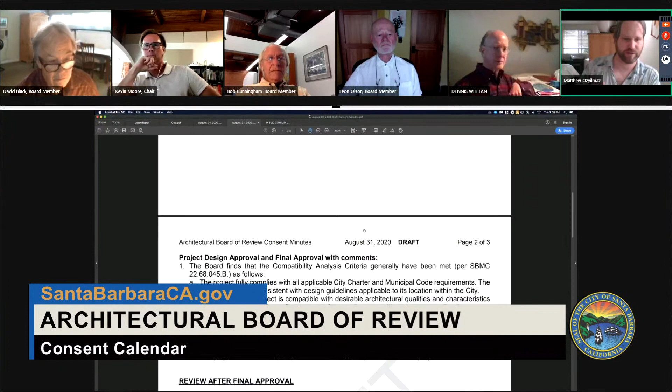Okay, and we can move to approval of the consent calendar for the 31st. All right, move we accept as presented. So we have item A, 626 West Cota Street, which was granted project design and final approval.

And then we had item B, 29 South Milpas, which was continued to the full board with comments. And I believe there was one more, yeah, item C, 401 South Hope. The proposed changes to the mullions was denied by the consent reviewers.

Okay. Move we accept as presented. I'm sorry, was that a motion? Yes, okay sorry, yes that was a first by Leon and David, were you seconding that? Yes, I can second that.

Okay, let's vote. All right, we have Chair Moore, yes. Board Member Black, yes. Board Member Cunningham, yes. Board Member Olson, yes, and Board Member Whelan, yes. All right, motion passes.

Thank you, okay, and then moving on to today. Yes, Mr. Chair. So for today's consent agenda, September 8th, we had a technical difficulty where the link on the agenda was incorrect, so members of the public were unable to join us. So all items on this agenda have been postponed 1 week. Okay, that is unfortunate, but part of what we are going through right now.

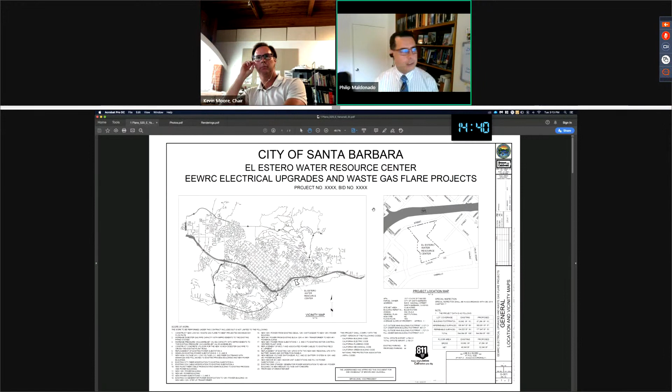But Matthew, if you could move to the second sheet in this set of plans. This is really what I'm here to discuss. This gives you an overview of the plant site and everything that we are looking to change or renew at the location. For a little bit of background, this is a necessary project for a critical infrastructure system that supports all of the processes at El Estero. The goal of the project is to eliminate the risk of failure by replacing the aging electrical distribution system infrastructure, improving redundancy, and eliminating single points of failure within the system.

For a little bit of background, the existing electrical distribution system and substations are all original 1970s construction. They are past the end of their useful life and are susceptible to catastrophic failure in general. The electrical system supports all of the other systems within the facility. The critical nature of the system combined with the risk of failure continues to make this work the highest priority for maintaining this facility. This project focuses on the main power feed and distribution panel, the 5 substations, and feed lines connecting all of that equipment. And if you take a look at the existing plans, you can see how we plan to replace the existing system by building a system in parallel.

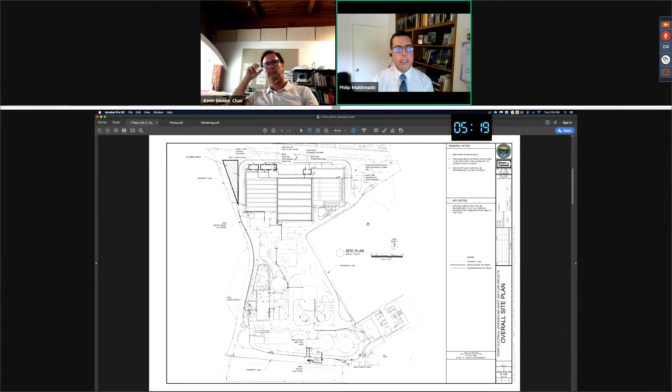So at this point, going back to the plans, this hopefully gives you better context of what this plan depicts and how we plan to replace a critical piece of infrastructure. We made sure to pull out the existing architectural elements that were approved with the original facility, and that's what has been incorporated.

So we feel we have substantially conformed to the existing aesthetic of the facility and surrounding area, and we are including the lighting standards. Keep in mind these facilities are utility in nature, not made for continuous human occupancy. They will have high voltage power equipment installed within them, and they're there to keep the plant functioning as intended. With that, I'll leave it to the board for questions or input.

That'd be much appreciated. Okay, thank you.

Let's open public comment now. If any member of the public would like to address the board regarding this project, please raise your hand. Thank you, Mr. Chair, I don't see any attendees at this point. The only one we have is actually a panelist for a later item. We did not receive any written public comment.

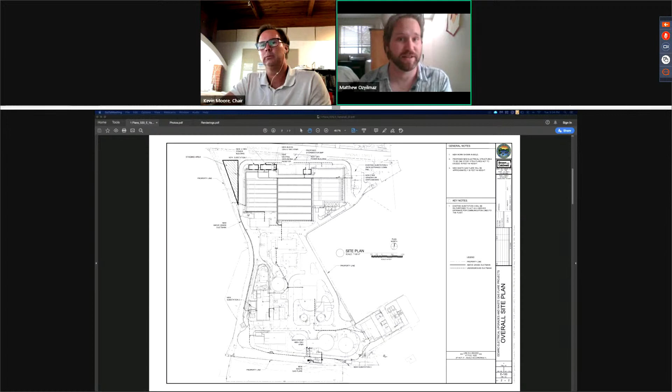Okay, great. Then we will close public comment and go to questions. Oh, go ahead, Matthew, one thing to consider, I should have made this announcement at the beginning. This project does need a coastal development permit, so this will need to go to the Planning Commission. Keep in mind that if you send this on to Planning Commission today, we need to make a preliminary take on the project compatibility analysis. Okay, so we're going to move on to questions from the board.

If we could have the applicant back up on screen here. There they are. Okay, I'll start off with a couple of general questions. Are any of these buildings going to be actually visible from Yanonali Street or any of the surrounding streets?

Chair Moore, members of the board, yes, the buildings along the north side will be, I would say, partially visible. I took photos from the street to show what is already screening the existing facility. These will be basically nestled against the existing buildings, which will be taller than these new buildings being installed, so it'll be a limited view from the street.

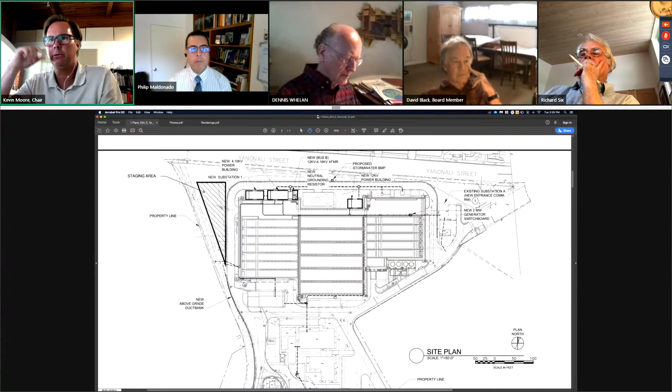Okay, so the buildings, for instance, the new 4.16 kV power building and the new substation 1, will be visible. And then the 12 kV power building, that will be visible as well? Correct. Yeah, you can see Yanonali Street is adjacent right there. There is a fence line that runs on the backside of the sidewalk, along with the tree line in between.

Okay, and are these buildings raised for flood issues? Or are you going to keep them on grade? They will be on grade for the most part. The entire facility is actually at an elevated elevation when it was originally constructed in the 70s. Everything here was put in on fill and raised well above the floodplain at that point. It may be slightly above grade, just given the current flood elevations, but we're working through that as part of the design.

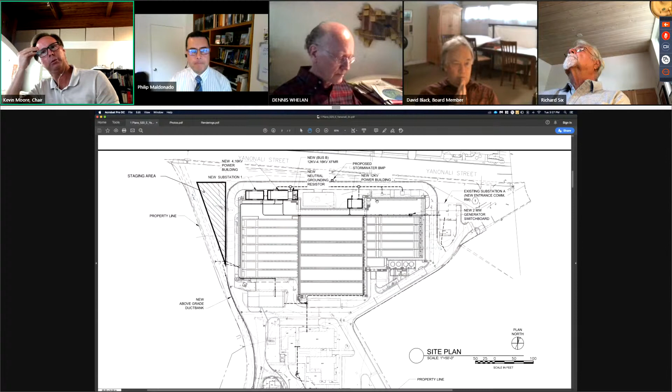Now, do you have an actual elevation of the building showing the height of the roof and all that? Can we flip to those drawings then? Yes, we do. Right there, and I believe we're just above 15 feet on the elevations for these buildings.

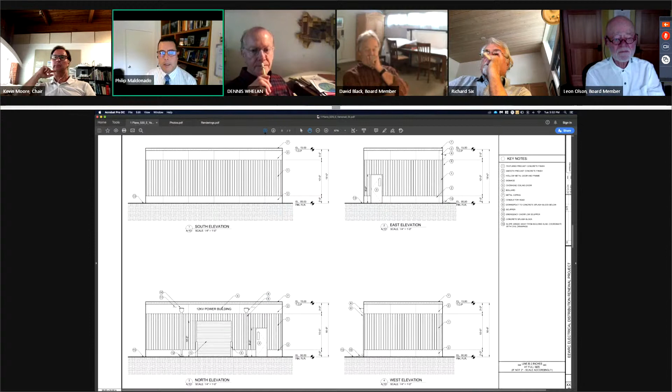Thank you. And I assume you've met the required setbacks. On one of the pictures too, it looked like one of the new buildings was quite close to the sidewalk, and again, I was a little disoriented on that particular picture. But the question is, the assumption is here you've met all the required setbacks. Yes. Thank you. Chair Moore, Board Member Olson, if you look at the plan sheet, Matthew, that'll show you where the right-of-way lines are on Yanonali. And then it, like I said, this will be well inside the plant facility, away from that right-of-way along Yanonali Street. Thank you, that's all my questions.

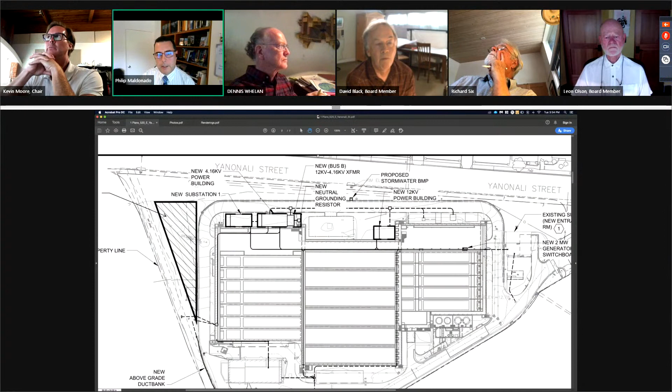On the south side, if we scroll down on the plan sheet, Matthew, on the south side, the building there, we will be putting that building on hardscape, existing hardscape, and any additional open space around that will be for stormwater BMP installation. And then you see the dark line on the south side, that is a fence line. So there's very limited green space there, but there is that green space that is available.

And then on the west side, the building, substation number 2, I'm sorry, on the west side, Matthew, I apologize, at substation number 2, that again is on existing hardscape. And if you see, there's a roadway adjacent to that, and then the edge there is Laguna Channel. So that's within the 50-foot buffer zone of that channel. I don't know what leeway we have for installing any additional screening there, although it is already, the photos I had showed it's pretty well grown in on that side of the facility. Okay, thanks. No problem.

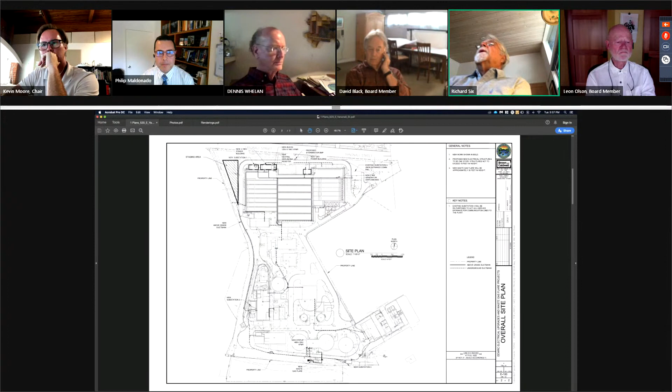Well, it involves several. Why, especially on the west side, substation one and the new power building are adjacent to each other but separated? Can those be unified into one continuous building of a bigger form to kind of harmonize with the bigger form of the building, or did I miss something?

Chair Moore and Board Member Six, I don't have an answer for you right now. One of the things the designer did attempt to do is maintain existing walkways and access ways. So I'd have to take a look at whether or not there's a door entrance there that they were trying not to block, or if there is an electrical code requirement that requires the separation of those buildings. Those would be some of the things that may require them, but other than that, I couldn't tell you for certain. And I'm eyeballing that one.

Substation one and the new 4.16 kV power building are slightly different widths. And why is that? I'd have to look at the plan sections. Do we have those in the plan sheets? The width dimensions are not on the plans, so... Anyway, I apologize. We did receive updated plans, and unfortunately, I was not able to get them in front of you before this meeting. Okay, thank you.

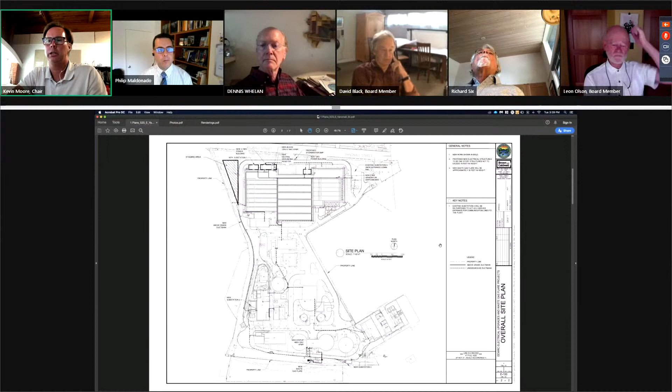You don't happen to have, sorry, this is to the applicant, you don't happen to have an aerial photo showing this site in relation to the neighborhood, do you? Chair Moore, no, I did not submit that except for the cover sheet here where you can see the plan view of the surrounding area. I don't have the aerial though.

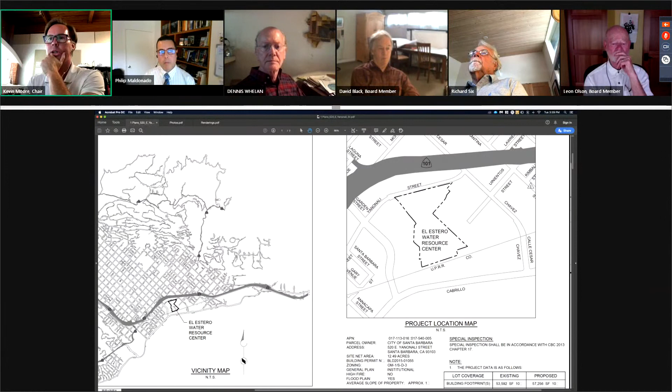Okay, all right, well, let's go to comments. So this is concept review, so let's try and keep it sort of high level. Let's not get too down in the details yet.

Let's see if we can give comments that would relate to a planning commission review, that type of level. So are we comfortable with the direction of the design and the mass, bulk, and scale, those sorts of things, and any issues like suggestions for landscape screening, etc., would be appropriate, I think, at this time.

Mr. Whelan, would you like to make any comments? Conceptually, the proposal seems just fine. I do think some additional landscape along Yanonali Street to screen the new devices would be in order. I'll leave any further comment to our landscape designers and architects.

Okay, Mr. Black, your comments. Yeah, I mean, architecturally, I think the proposed buildings look fine. Like Mr. Whelan, I was a little bit concerned about the landscape along Yanonali. That seems to be the most obvious view from the public way of the new buildings. I would like to have, when you come back, provide a more detailed site plan, at least for that area.

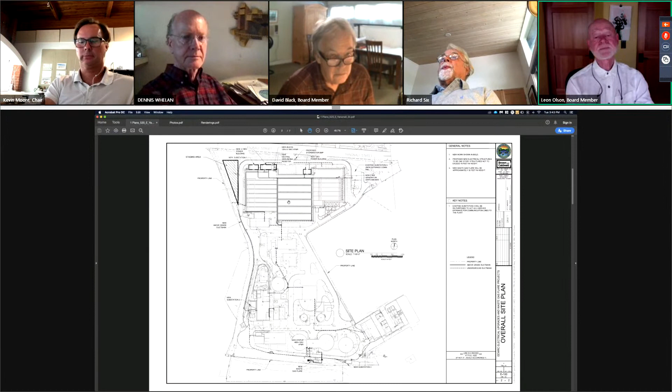Okay, I don't have anything further to add. I would, this is a question for staff. So their goal is to move on to the planning commission. It sounds like we, as a board in general, want some additional information about, particularly along the Yanonali Street, and what's existing and what's proposed. So it might make sense for them to come back one more time to show us what's going on there and what their hope is before they move on to the planning commission, so we can give them more positive comments.

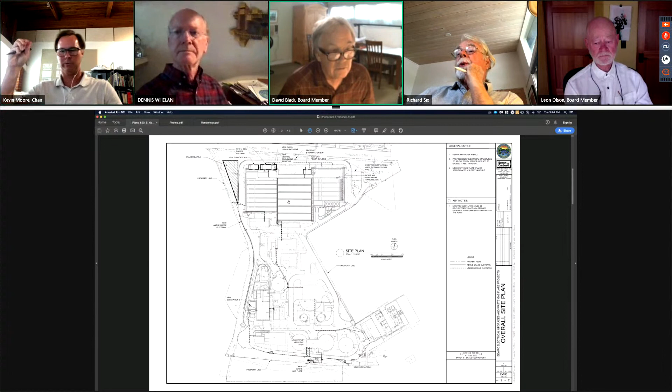That was a question for Matthew. Mr. Chair, can you repeat the question? I apologize. Sorry. It sounds like the applicant obviously is wishing to get in front of the planning commission as soon as possible. And it sounds like the board in general is looking for a little bit more information about what's going on along the Yanonali Street, what's existing and what's proposed as far as landscape, et cetera. So I could see there being a motion to continue it to the planning commission, but there may not be all favorable comments and maybe some constructive criticism.

Yeah. You could send it to the planning commission with the conditions for enhanced landscaping screening for the structures along Yanonali. That type of work typically isn't what this planning commission would review for a coastal development permit anyways. It's mostly about the buildings. I will leave it to the discretion of the board, but I see a benefit both ways. And it would be great to have all positive comments, but I don't necessarily think that asking for more landscaping is something that would be a make or break deal for the planning commission in their review of the coastal development permit.

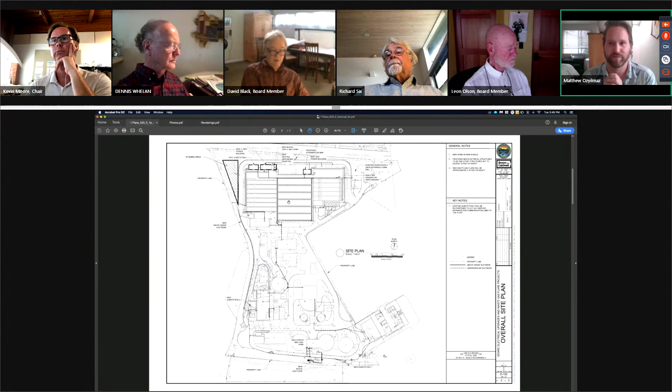Okay, well then, thank you for that, Matthew. I'm going to make a motion to continue the project to the planning commission with the following comments: that the board in general accepts the design, the mass, bulk, scale and current design of the structures as proposed. The board has concerns about the removal of landscaping along Yanonali to construct the project, and would like to see additional landscaping and landscape design to screen these new buildings. And that all the building details shall match the existing buildings.

They'll have the chance to come back to us to show us what they've done, and we can continue to work with them to finalize that.

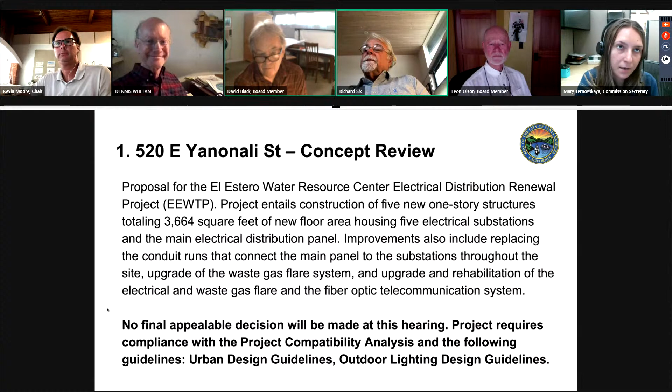Any other discussion? No? Okay, let's take our vote. This is Mary, I will take the roll call vote. Chair Moore, yes. Vice Chair Six, yes. Board Member Black, yes. Board Member Olson, yes. Board Member Whelan, yes. All right, motion passes.

Thank you very much. Could I figure out a way to put a little lilt in my yes, like Richard just did there? I didn't realize that. Now I apologize. What? All right, that's good practice, that's all it takes.

Okay, how are we doing on time here? We've got item number 2 queued up. Are we scheduled for 4? So technically we could start - is that correct, Matthew? That is correct, Mr. Chair. Okay, we have the applicant. We do, there he is. Okay.

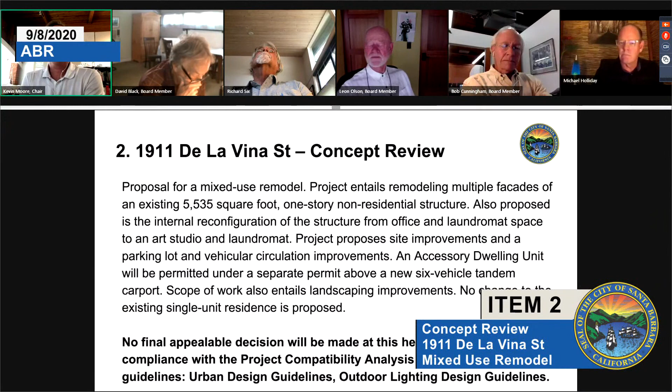So this is item number 2, 1911 De La Vina Street. This is a concept review and a proposal for a mixed-use remodel. The project entails remodeling multiple facades of an existing 5,535 square foot, 1-story non-residential structure. Also proposed is the internal reconfiguration of the structure from office and laundromat space to an art studio and laundromat. The project proposes site improvements, a parking lot, and vehicular circulation improvements. An accessory dwelling unit will be permitted under a separate permit above a new 6-vehicle tandem carport. Scope of work also entails landscaping improvements. No change to the existing single-unit residence is proposed. No final appealable decision will be made in this hearing. This project requires compliance with the project compatibility analysis, the urban design guidelines, and the outdoor lighting design guidelines.

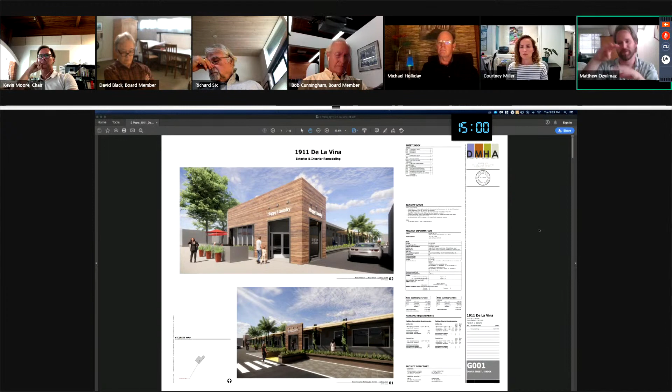Before we jump into this, a question for staff regarding the ADU - is that something we're looking at as the design board, or is that out of our scope? Thank you, Mr. Chair, for asking that question. The ADU will be submitted directly to Building and Safety without design review, per California state law. However, the board does have purview over the parking areas. The carport doesn't directly serve the ADU, from my understanding - it's tandem parking for the art studio, so you do have that area. But anything basically from the floor of the ADU to the roof, or anything in terms of circulation, you can't comment on at this time. Okay, great, thank you for that.

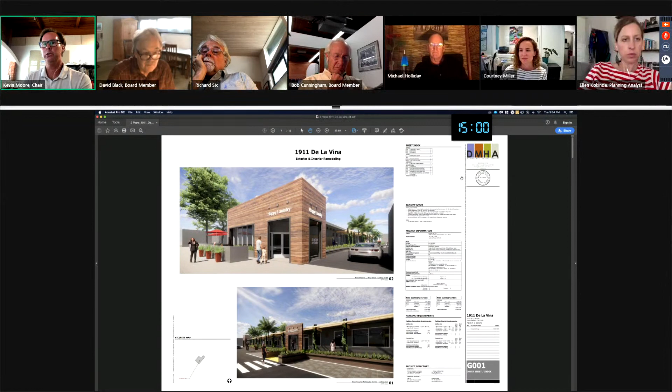Before the applicant gets started, I want to let you know we have a 15-minute timer on the screen, and we ask that you try your best to limit your presentation to that time. If we see you need a little more time, we can try to give that to you. If you could introduce yourselves and locate where this project is for us. Mr. Chair, quick interruption - if I could just ask all the board members to please mute themselves during the applicant's presentation, just so we don't pick up any background noise. Thank you.

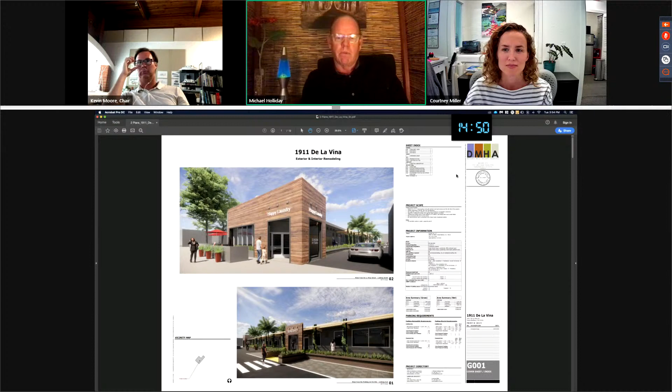Thank you, Chair Moore and board members. My name is Michael Holliday, I'm the architect for this project with DMHA, and also Courtney Miller with Courtney Miller Landscape Architects is going to be presenting the landscape. The project is 1911 De La Vina, and this is just a cover sheet.

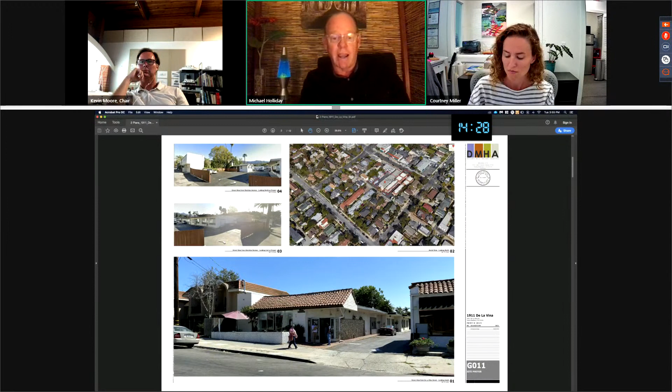So we'll go to the next sheet to orient you to the site and show you a little bit more about existing conditions. The image on the lower right pretty much tells the whole story right there. It's really an existing dated building that's a laundromat, actually, that opens right out onto De La Vina. And then there's a driveway that allows passage through to the inside.

You can kind of blow that up a little bit. The building on the right is existing, it's not on our site. And we've got an interesting driveway situation with the property line running down, not quite the center of that street, but we only own a portion. Well, most of that street belongs to our property.

If you scroll up a little bit, you can kind of see some of the context for this project. There's a sort of backside, which is in the upper right hand - you can see the site and where it is located in context to the commercial buildings, as well as the other residential buildings that are sort of all around it, which is why the ADU makes sense on the backside of the site.

The two images on the left side show the view from the back alley portion, looking back towards De La Vina, so you can actually drive all the way through the site. The building on the left in the upper left corner is a residential structure as well, and the fence is not actually even built on the property line, so the property line is actually out about 3.5 feet to the left, where the demarcation is between the darker chip seal and the asphalt.

The lower building shows the existing structure, which is a kind of modernist, simple, straightforward box of a building that we're trying to clean up quite a bit. So that just gives you some context for the back view and the front view of the property. We can come back to these if there's any questions.

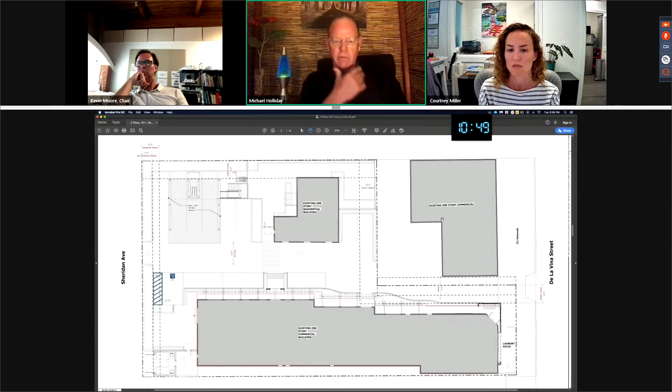This kind of shows you the context that we're working within: the existing single-story commercial building down below, the existing one-story residential building up above, and the existing one-story commercial building towards the front, which is not on our property. So essentially what we're doing is a facelift - it almost ends up being the northwest elevation, the upward elevation of the building, and reworking all the parking and providing ADA compliant path of travel to the public way and to the

parking all the way in the back, so if you look at that ADA parking space and loading area in the rear, and then we're creating an ADA compliant walkway all the way across the front of the building. Kind of run your hand along the front.

It doesn't comply right now, so we're widening that to comply, and we're adding a little planter and some permeable pavers for some parking.

Working with the existing site and setbacks allows us to put that little ADU up in the upper left-hand corner. That's not part of what we're presenting, and he doesn't even plan to construct it right now, but we do want to put in parking that allows for this future ADU to be over the top of that parking, so it just shows we've been able to fit that in there.

The trash and recycle bin is at the lower left-hand side, right down there. That actually backs up to the existing trash and recycle bin on the adjacent site, so it's a perfect complementary use for that area. The dumpsters will be rolled out onto Sheridan and serviced by MarBorg. We've already got MarBorg's approval on that whole layout, and that's also ADA compliant.

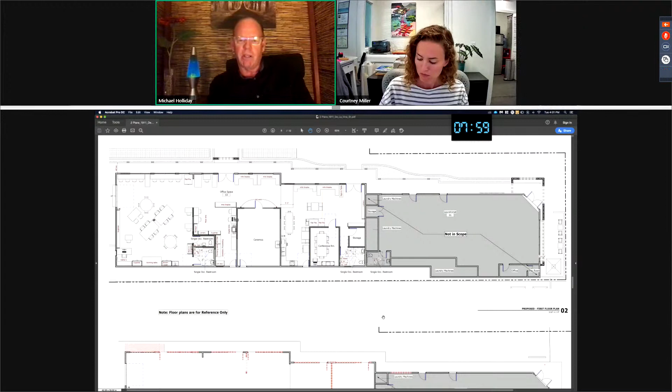Yeah, we can zoom in on the upper drawing a little bit. This shows that we're essentially adding a new walkway all the way along the top side of the drawing, and that little planter area, which is the curvilinear element, is a new planter we're adding across the front of the building to protect people from the parking, and also to create a new landscape buffer to that west elevation, which really gets baked by the sun in the afternoon.

We've got a lot of glass there that we're proposing. Well, it's actually existing, and we're just replacing it with new energy efficient glazing. No interior work is proposed in the scope for the laundromat.

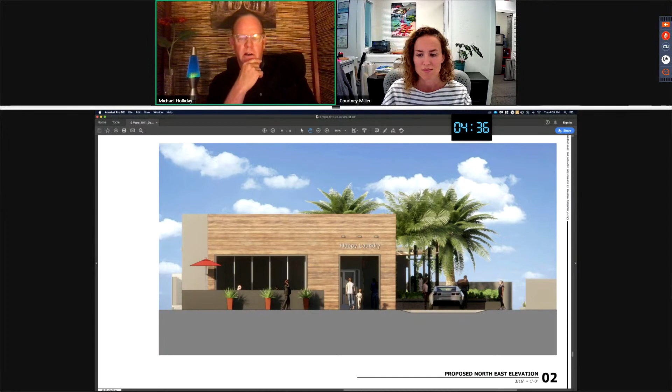We can zoom out on this. We need to go back to landscape here. After this, let's see what we've got.

I want to leave Courtney time to cover the landscape, so maybe we can go back to that plan and zoom in a little bit on the landscape elements. Courtney, why don't you walk us through this, as well as there's an updated plan that didn't get to ABR in time for today's presentation, but I'm going to let Courtney walk us through the elements.

Thanks, Michael. So as Michael mentioned, I think the goal here was to address as much landscaping as we could get, given the constraints of the site. We really wanted a much better pedestrian experience and a better buffer between the existing one-story commercial building on the bottom of the plan and the drive aisle adjacent to it. Right now it's pretty bleak - just concrete adjacent to the building and then an asphalt parking lot.

So Michael and I stood out there and came up with this concept of implementing a trellis structure along the north side of the building. We've got a skinny planter that runs between the walkway and the parking area.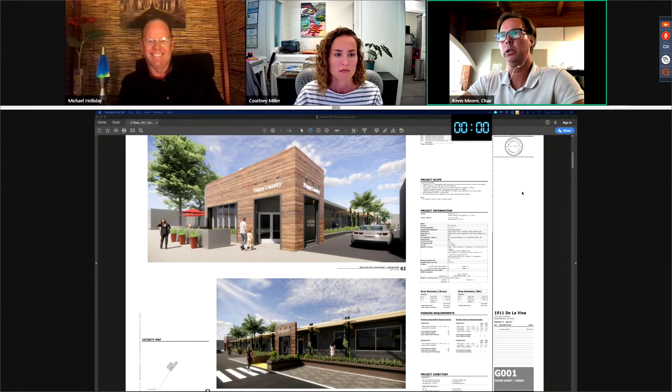Okay, thank you for that. Good job on the timing. Appreciate that. So we're going to open public comment for this item.

Is there any member of the public who would like to address the board? If you are joining us from the public and wish to speak, there is a hand icon in the top right-hand corner of your screen. If the arrow is red, that indicates it is raised. We do have Ms. Sheila Lodge who would like to speak, so I'm unmuting her now, and she'll have to unmute herself as well. We'll wait until we hear her voice before we start the timer.

Okay, if you could wait just a moment. Yes. Okay, if you could wait just a moment. In any event, I will go ahead. I'm really perplexed to see this design.

I'm speaking for myself, by the way. I'm really perplexed to see this design, especially given that the function of the ABR and all the design guidelines refer to Santa Barbara's historic, distinctive, and distinguished architectural past. This would be such a jarring element in the streetscape here. There's no relationship whatever to the buildings around it. It is, I don't know, David Gebhard, the architectural historian, might have called it San Francisco Bay Area period style, but it doesn't say anything that reflects Santa Barbara. That doesn't mean it has to be white stucco and a red tile roof, but this is, to me, quite inappropriate, and I hope you will ask the architect to come back with a design that looks as if it belongs in Santa Barbara. Thank you.

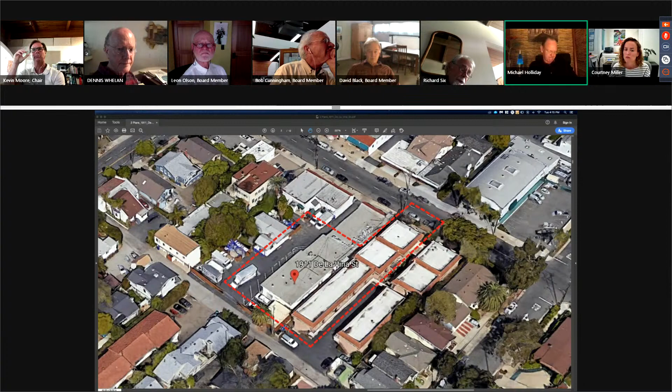Well, thank you, Michael. My question isn't contextual, it's more factual. How much taller is the proposed facade from the existing facade? Yeah, it looks to be quite a bit.

Sorry, Dennis, I didn't answer your question. We've essentially taken the height of the roof and wanted to screen that. You really have to zoom in on the picture of this building. There's no way to add the weight of this tile roof - the structure is actually sagging. The structural engineer is even concerned about it. We're cleaning that up - the tile is going to be removed and recycled. The waterproofing will be kept, so it'll be a 90-pound cap sheet.

And then we're just setting the height of that ridge to be concealed. The building on the left-hand side is part of our structure, which is a simple box building. So it's really just the corner of this building that's got any semblance of traditional Spanish colonial revival. If you look at the buildings right across the street, we're in scale and architectural context with what's there. This is going to be an art complex, so we're trying to create something artistic and interesting. The buildings in the upper right-hand corner have absolutely zero context for much of what's Santa Barbara. We're trying to blend with the existing structures as much as possible without going above the height.

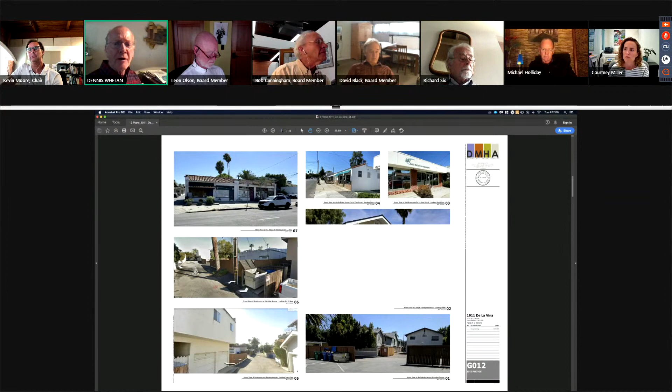In the previous photo you showed of the entryway, what are the changes proposed for that laundry patio wall? Right now it looks to have a lattice on it, and the proposal doesn't really look like that. Could you talk about that, Courtney?

Sure, and I think Michael might need to chime in here too, because we kind of worked together on that element. But I believe the idea was that we would be rebuilding it. I think we're going to need to do some retaining there because there's a grade change, and the existing cross slope and longitudinal slope don't currently meet ADA. So we'll be fixing that, and then the wall itself, I think, concrete.

Michael, what do you guys currently have? That's currently a non-conforming existing condition that doesn't work. We've got to retain a little bit of grade - we can't modify the street slope of the sidewalk. So we're just putting in a CMU retaining wall essentially and plastering that, so you can sit out on that patio and enjoy the laundromat, but also have a secure space that doesn't slough. We don't have the grade and water from the site above dripping down onto this property. So we're resolving all the drainage issues in that front entry area.

Thank you, that answers my question. And one final one for both Courtney and Michael - what is the difference between boardwalk paving and concrete paving?

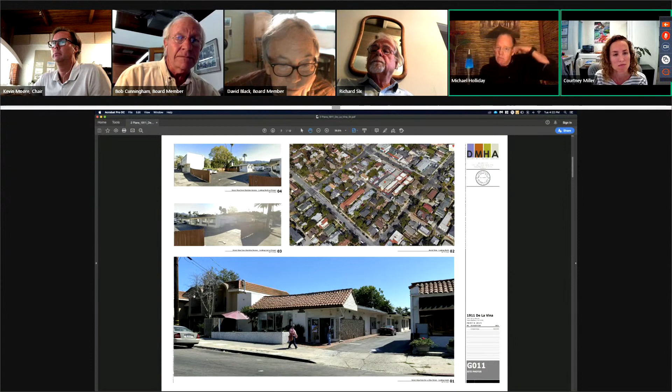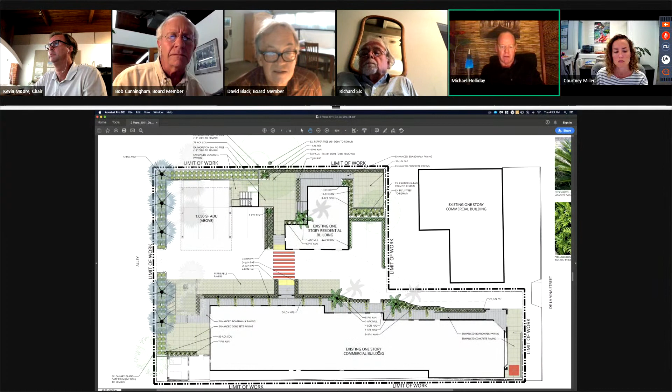What is the proposed use or design for the long open space running along the south side of the building? Is that simply for utility use? Yeah, if we can't get this simple facelift approved, the building's just going to stay the way it is. So we've tried to come up with the least expensive, most transformative revision to the front. The back of the building there is just going to be painted. It's the back entryway, so service exits for the existing one-story commercial.

Now, can we go to the south elevation of the building where we see the Timber Tech transitions to the dark gray paint? There we go, the right hand end, no, I think the lowest elevation. This is the back, yeah, there you go, that's the back side.

Okay, that also responds to board member Whelan's comment about the height. We've just taken the existing box, which we're leaving there, and we're just trying to tie this one building together so it looks like one building.

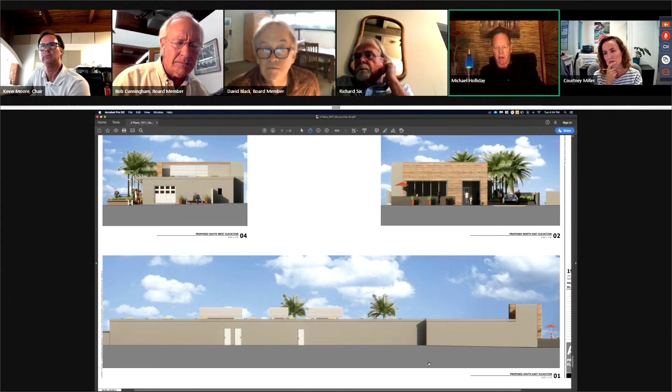Okay, understood. Did you consider wrapping the raised element of the building at the far right hand end with the Timber Tech rather than stopping it where you have? We did, but scope creep on this project is an issue, if we can't do something simple it's just going to be a painted building. So we had to stop it somewhere, and we're trying to cover up the one corner piece of the building which really didn't fit with the rest of the structure.

One final question, have you considered using the Timber Tech on the HVAC screens on the rooftop? I understand what you're doing with the screening, but it seems like there's an opportunity there to extend the enrichment of the building to elements that are plainly visible and maybe could be made to look a little more cohesive with the rest of the architecture.

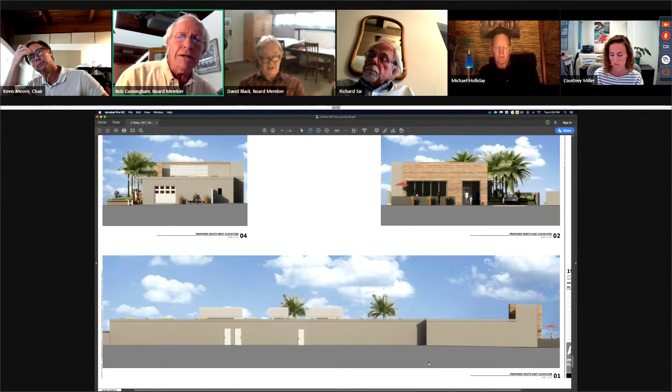That's a question, obviously followed by a comment. Chair Moore, board member Cunningham, that's a great suggestion, that was actually another thought that we had. So if you go up to the upper elevation, you can see how that would help to unite all of it, carrying that Timber Tech material all the way through. That's a good suggestion.

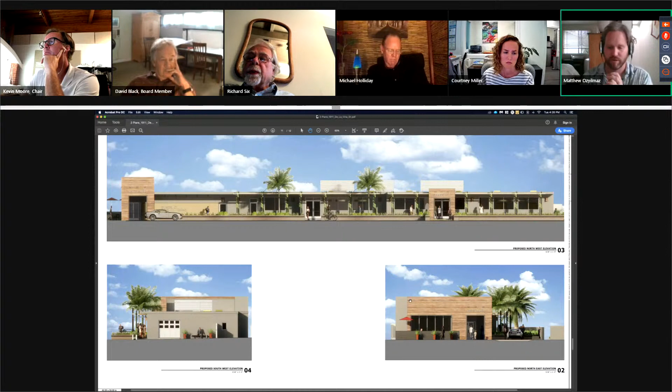So the standards that this ADU is required to adhere to are zoning standards. There used to be an objective ADU design checklist submitted alongside any application in the city for an ADU. However, state law has made that null and void, and we're working on our own new ADU ordinance that complies with state law, but as of right now we do not have jurisdiction to control any design. So the objective design standards that follow the El Pueblo Viejo standards are not applicable to these ADUs, correct? Correct. Okay, thank you.

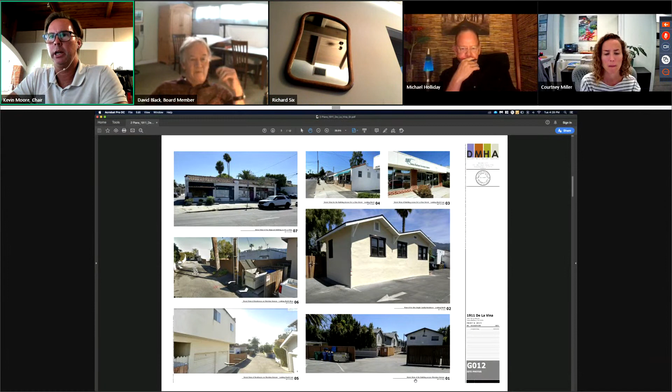So let's just go one by one. In the upper right, that is across the street, is that correct? That's correct. Directly across the street is a series of modernist buildings with brick and reflective glass and horizontal parapets. To the left of that image is a building to the north of our structure, which is also slated for renovation.

Our hope is the people moving into this building are an art group, and they really want to create a presence of an artist. They love the funk zone, they love that kind of area. They can't afford it, so they've taken this sort of rundown building. That's the goal of what we're trying to create here, a little bit of an artist area. But that building will remain; it's not on our site.

Okay, the other sheet shows - I think it's really important to understand what we're working with here. Maybe it's G011. The images in the upper left-hand corner really show the context of what we're dealing with. It's 95% horizontal, straightforward, and the drawings pretty much show that. That's what we're dealing with.

So we can't add any structure to the roof. We can't add tile roofs. The building won't accommodate it.

Okay, so can we slide over to the right and get the bird's eye view a little bit? Maybe this will be more illustrative for us. So if we get closer to the De La Vina portion, could you zoom in on that? Yeah, perfect. Okay.

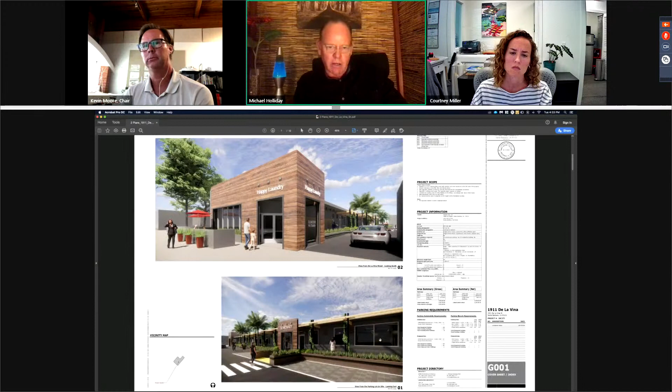The client who just purchased the site really doesn't want to do this even. We convinced him that if we just leave the roof there, we remove the tile because it's got to come off anyway - structurally it's not designed to carry that heavy tile roof. Even the buildings next door are sort of overly stressed. So this could become a plaster element. I don't know, I think it's probably going to die, it'll just be repainted.

The idea started in the back where Courtney and I were thinking about how we could reskin the west face - it's really the southwest facing element of that building. And so that's where the trellis element, the integral color plaster planter, the permeable pavers, and the entrance for the slingshot come in. If you zoom into the bottom image, these two things kind of go together - this is probably 90% of the project, this little reskin of the building with trellis elements to soften that facade. So that became just this kit of parts, and the TimberTech was just a material that we knew we could use that was cost effective, that would create a sense of entrance for that front area.

Okay, all right, well that's all of my questions. Are there any follow-up questions from board members?

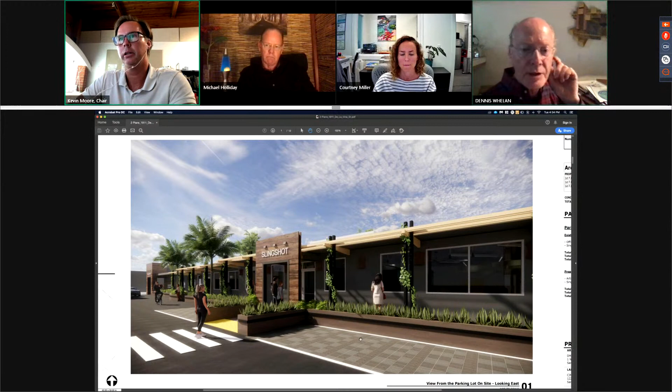Oh, Mr. Whelan, yes, go ahead. One small one - could you go back to the existing photo of the laundry entry?

There appears to be a support post. That's what we're going to call it. That'll be painted gray. It's very asymmetrical, and words fail me on how to describe that.

Is that structural, Michael? Is that holding up? That is holding up that whole front of the building, which is loaded by all that tile roof load. That's why the tile roof's really got to come off. If we touch it, we can't stop.

That's the problem, and so the tile roof has to go away. And therefore, if I may, a follow-up: the proposed building will actually move that support farther out to the current limits of the awning tile edge, correct? That's correct - we're cutting back the edge of the roof a little bit.

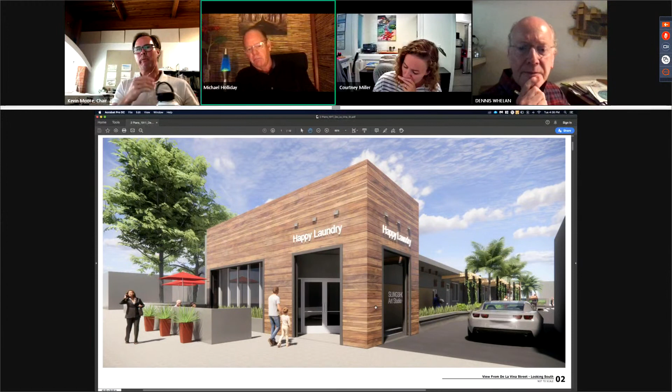And then if you go to that front entrance, it's pretty dangerous pedestrian situation right there with people and cars. So we're solving that - it's going to be a one-way circulation flow. If you go back to maybe the entrance or the cover 3D image, it kind of shows what we're doing right there, Board Member Whelan and Chair Moore. So defining the pedestrian circulation really just supports that so you don't get that completely awkward structural condition.

Okay, noted, thank you. That answers my question. Okay, Mr. Cunningham, looks like you have a question. Mr. Cunningham, you're still muted.

Okay, thank you. Michael, what's concealed under the ridge of that tile roof? Is that an empty void? Is there rooftop equipment there? And ultimately, can that height be reduced?

Yeah, there's structure. Again, we're removing - keeping the height of the existing element to the right. You can see the building to the left there, which is kind of a mixed bag of things. We're keeping the height of that squared element to the left, and then removing all of the tile, and then keeping the structure, which is trusses and framed elements, because it's the most cost-effective way to try to salvage what's there.

Okay, but is it necessary to keep the truss elements? We can't reduce the height of that - otherwise we end up rebuilding the entire roof over the laundromat. So this has been kind of the most minimalistic refresh, a reskinning of the existing structure without ripping off the roof. There's no work proposed to the interior of the laundromat. So even working around that roof - taking the tile off is one thing, but we can't get into restructuring the roof because the laundromat needs to stay in business.

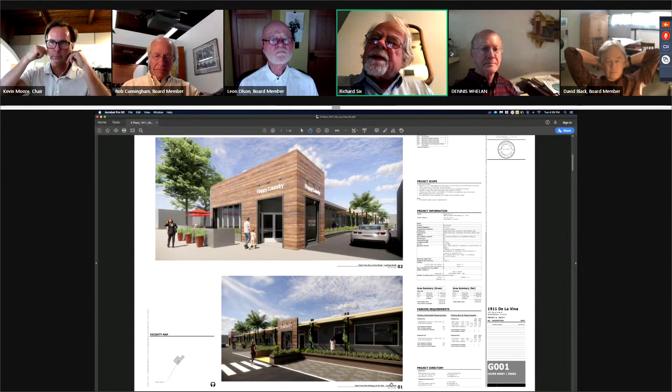So I think there is a solution here, Michael. I don't mind if the building is schizophrenic, but I think it's important to stay within the context of this charming, though humble, part of town. With the mansard roofs and the humble architecture, I think there's probably a solution where you only touch the very corner with a stucco mass, turn the corner, and do what you want with the back end, maintaining the strong context that the front of this building already has with the rest of the street. And I think that's it.

Okay, who else has comments? Everybody? Okay, well, let's just go down the line. Mr. Cunningham? Go ahead. Okay, thank you.

I think, first of all, the Moreton Bay Fig and the Palm need to be addressed comprehensively before the project goes any further. I would recommend an arborist report. You're showing construction right up to the property line and right up against these trees. The Moreton Bay Fig in particular will just keep growing forever, and if you're assuming you can just build right up to it and stop without taking reasonable precautions, I think you're asking for trouble.

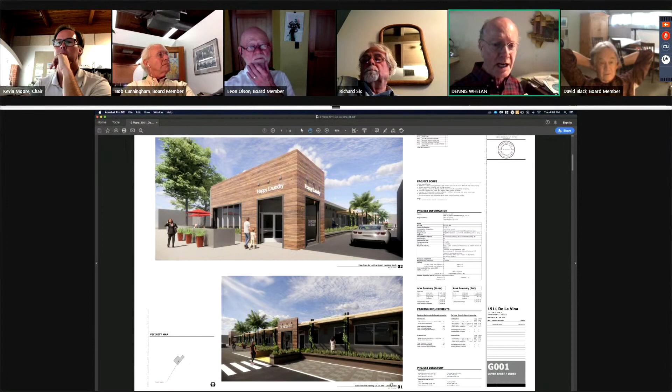I do think there is a missed opportunity. I don't see the relationship of the horizontal wood siding to modernist or even mid-century architecture. I think that's quite contemporary, and that this solution is quite a contemporary solution. And then I do think the design is very successful in separating the pedestrians from the rather hazardous vehicular roadway. However, both the building and the planter are going to be targets of vehicles, and I think some special consideration about the eventuality of cars bumping into the building and the planter should be made. Thank you.

Okay, Mr. Black, any comments? I think for the most part, I would agree with the comments that have been made. I am troubled by the use of the TimberTech material—it just seems a bit incongruous in that neighborhood. Maybe it's just a matter of rethinking the form of the laundromat and the other entry down the alley there. So I think it really needs to be reevaluated in terms of its continuity with the neighborhood. That's all.

Okay. Mr. Six, you had something additional?

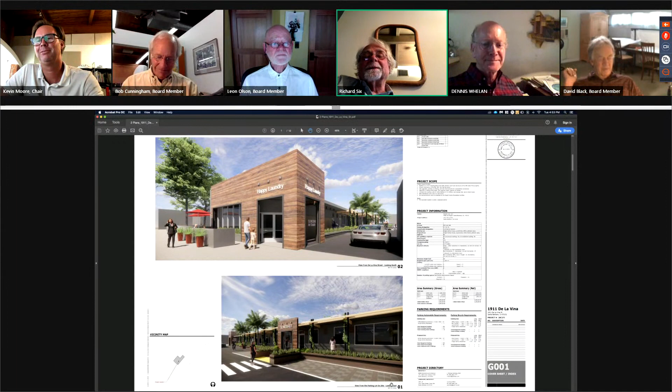So that's our motion, Mr. Chair. Okay, why don't we read that back so we're clear. All right, so the motion is to continue indefinitely with the following comments: given the extreme limits of the program, study a way to make the front part of the building consistent with the prevalent context of the intersection and the streetscape. The applicant shall return with a comprehensive arborist report focused on the fig and Canary Island palm and also the existing ficus tree to be preserved. And the applicant will also consult with the arborist about adding a street tree on De La Vina.

Mary, it's the Canary Island palm. I think you said Canary Island plum. You're right, thank you. Okay, anything else? That sounded accurate to me. Yes, okay, well let's take our vote.

All right, so we have Chair Moore, yes. Vice Chair Six, yes. Board Member Black, yes. Board Member Cunningham, yes. Board Member Olson, no. And Board Member Whelan, yes. All right, the motion passes.

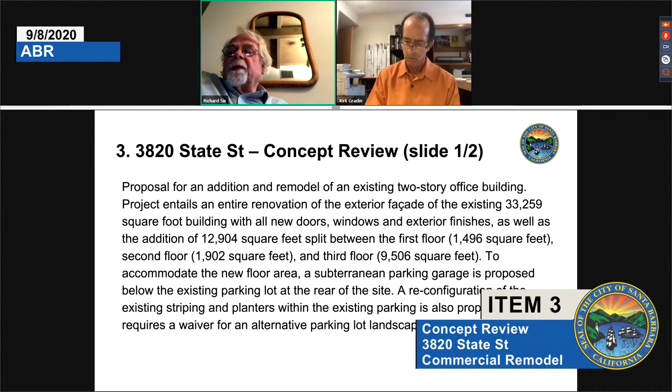So our next item is 3820 State Street. This is concept review, a proposal for an addition and remodel to an existing 2-story office building. The project entails an entire renovation of the exterior facade of the existing 33,259 square foot building with all new doors, windows, and exterior finishes, as well as an addition of 12,904 square feet split between the first floor, 1,496 square feet, second floor, 1,902 square feet, and third floor, 9,506 square feet. To accommodate the new floor area, a subterranean parking garage is proposed below the existing parking lot at the rear of the site. A reconfiguration of the existing striping and planters within the existing parking is also proposed. The project requires a waiver for an alternative parking lot landscape design. No final appealable decision will be made at this hearing. The project requires compliance with the project compatibility analysis and the following guidelines: Upper State Street guidelines and outdoor lighting design guidelines. So with that, I see that our applicant is here.

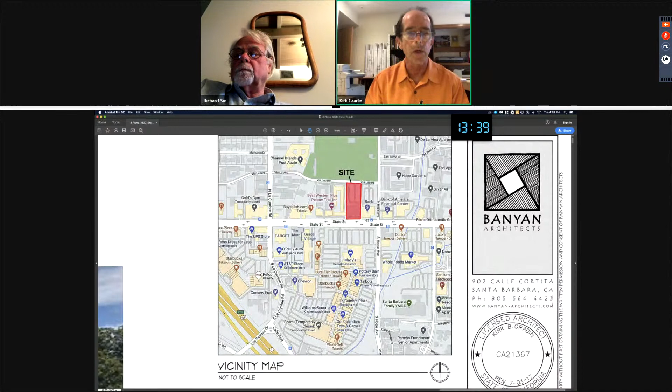So north side is the cemetery. The west is the Best Western Pepper Tree Inn. Directly across the street on State Street is the Macy's building, the La Cumbre Plaza, and the Macy's parking lot. And then on our immediate east side is the 2 banks - the Wells Fargo and Montecito Bank and Trust building, which you'll see as we go through the imagery. If you could go to A50, please, and we'll start walking through the photos.

So you can get the existing context. Yes, so the top right is an aerial view, which shows the location of the photos for reference.

But the image directly to the left of that, number 1, shows the front of the building. And you also get a hint of the buildings on either side, the Pepper Tree and the bank building on the opposite side. So the existing building is roughly 50 feet away from the front property line, which is at the sidewalk. It's also on a pedestal that's a planter area that's about 5 to 6 feet high, depending on where you are. There's a drop to the site, to the Pepper Tree site there, that also varies anywhere from 6 to 8 feet drop.

And the building, the bank building on the other side, is also on a pedestal, as you'll see. And there's parking in the front. We'll get into that when we look at the site plan, as well as in the back, of course.

And if you go to the next image, number 2, which is just to the left of that, which shows the Pepper Tree in greater scope, and also the relationship between the 2 buildings. And also that there's this, besides the number of trees there at the forefront, there's a tall oleander hedge that divides the 2 buildings at the property line, and about a 12-foot planter on our side.

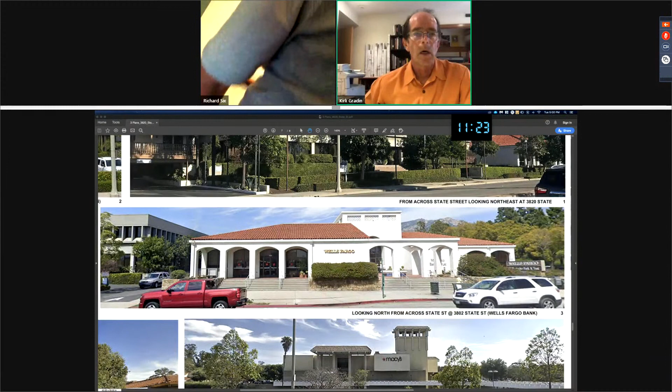There is the bank building, which, although it's a 1-story, it's a tall 1-story. And you can see, as I mentioned, it's also raised up off the sidewalk level. And you also, it's notable, I just realized there's not a single street tree or other tree in front of this building. Interesting. Okay, so number 4, which is just to the left of that image,

is standing at the driveway looking at our existing building. And there you can see the planter that I was talking about, the raised planter, and just a better shot of the building and the driveway.

Thank you. So we can go on to 5, which is - thank you, yep, you found it - there's Macy's across the street. I know you folks are all familiar with it, so I'm not going to spend a lot of time reviewing it.

Number 6 is an important image because it's catty corner to our project, and it has a 3-story element that's right at the parkway on the Hope Avenue side. We are adding another story, and so this is an important consideration. And then number 7 takes us back to our property, and we start to go down the driveway there.

And you get an idea of, this is a 10-foot planter on our side, although the trees planted there are kind of pushing up against the building and then the bank building. You can see how the property rises to the back, about a 6% slope from front to back. So by the time you get to the back of the building, that raised planter is right at grade.

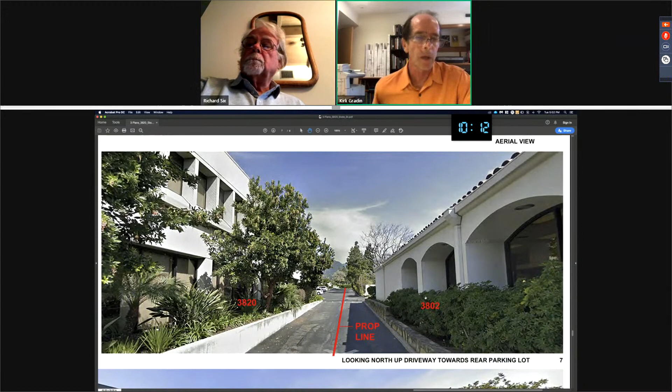Next slide, you can skip 8. It's another shot of the building, but number 9 is towards the back. This is the back northeast corner, looking at the back corner of the building, and you can see the pepper tree there in the distance, and the existing planting on the back of the building.

Number 10 is roughly in the same spot, just to the right there, but looking up towards the mountains and the Calvary Chapel, you can see where the property line is. So there's an access and egress easement that runs all the way front to back of the property that's shared with the bank building next door.

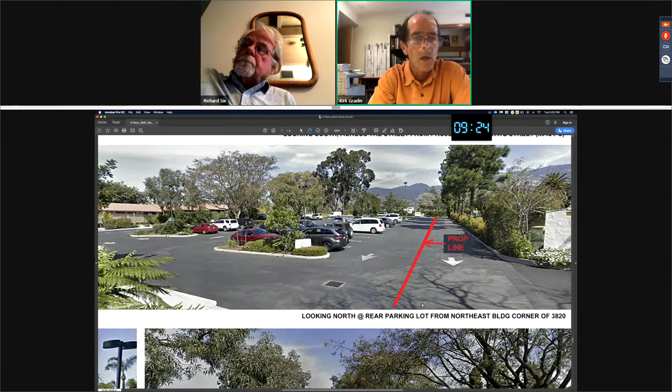Go on to the next slide, number 11, on the other corner of the parking lot, looking back again towards the pepper tree. You can see our building on the left and the relationship of the two. The oleander hedge there gets broken, and there's no railing even along there, and there's quite a drop. So we will also be providing a railing on that wall and reintroducing that hedge, if not also some trees along that side.

Number 12 is looking directly at the back of the existing building, which has this concrete canopy that was added about 15, 18 years ago, to enhance this back entrance. But you can see it's basically a big rectangle, kind of brutalistic style, and we're changing that completely. It's more traditional.

Next slide, 13, now you're turned around, looking back again towards the mountains. You can see the existing canopy trees, and this is part of our proposal. Because we're doing this underground parking garage in the interior of the existing parking lot, we're going to have to be removing these trees. But our strategy is that we're also providing wider and bigger planters at the perimeter in order to compensate, and we'll be planting canopy trees in that perimeter.

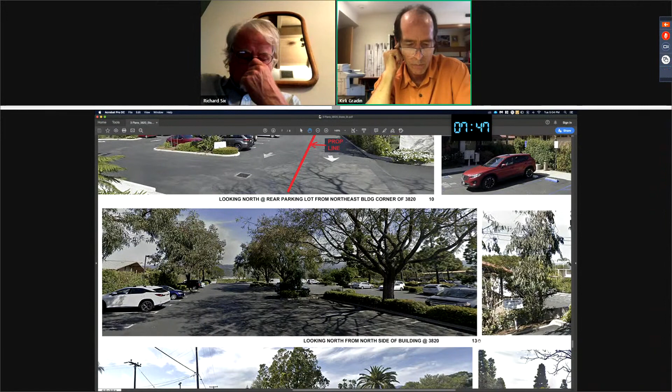Next slide, 14, takes us to that back northwest corner. You can see towards the left of that image the back corner of the 2-story pepper tree. And you start to see a little bit of the Calvary building and the lawns and Via Lucero, which is the street at the back. Number 15 is taking a few steps forward and looking the other way. Again, you see Calvary Chapel, the back part.

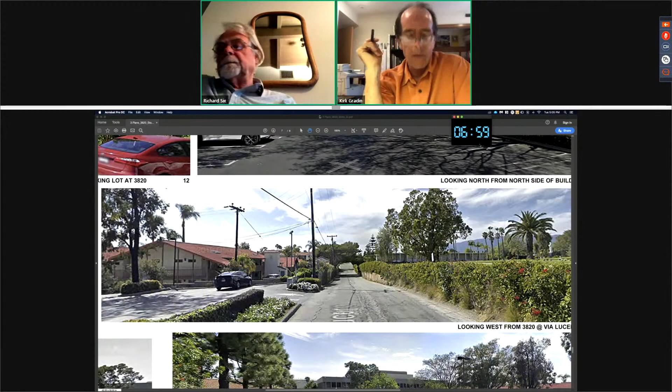Yes. I think the key thing about this, part of what the review hinges on today is whether our landscape design is going to work. We're not showing planting and trees, but we are showing planter sizes to accommodate for this underground parking. So this back parking area is an important consideration. We are making improvements at the street, so let's go on.

The next, A5.1, shows a little bit of neighborhood context. I'll just point out that in the last 5 years, there were 2 buildings on the same block across the street, which are 3-story buildings. It's slide number 29, down there on the bottom left.

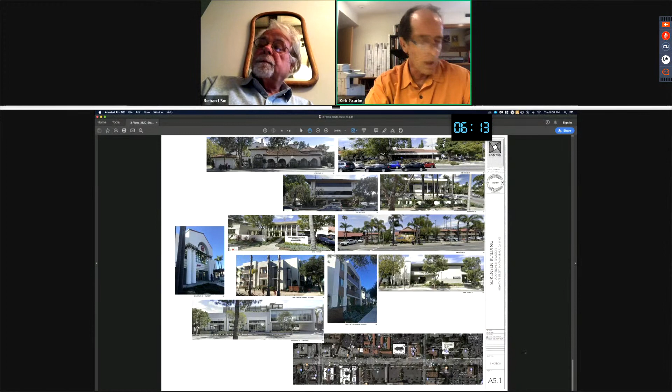This is the most recent, actually just prior to Grace Village, the Mark building, which is pressing the height limit with a 3-story building. Similar to ours, it's 2-story in the front, 3 in the back.

And then slide 28, right above that, where you have a 3-story building right at the sidewalk.

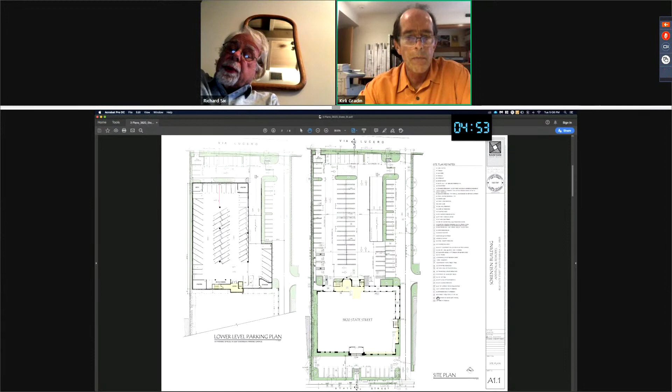But if you focus in down at the bottom of the site plan on the right, on the State Street side, we're expanding the planters there. On the left and the right-hand side, we'll be adding street trees and additional trees in the planters, existing planters. And if you could scoot up a bit.

On the west side, we're removing some very large electrical equipment that's next to the building in that planter, so we'll be able to increase the planting on that side. And then you'll see here, if you could scoot up a little higher, please.

There's the ramp going down, and you don't have to move the image, but on the left, the additional site plan shows the footprint of the underground parking. Basically, as you can see here, we're having to eliminate the planters that divide the parking currently between the aisles and the finger planters every 8 feet that are over that parking garage.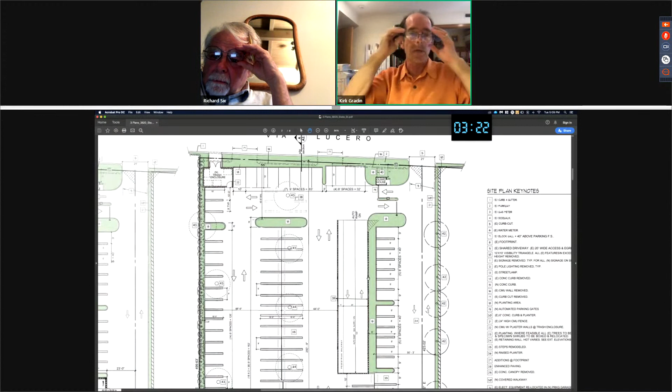But in compensation, we are increasing the planters first along Via Lucero. So you can see the dashed lines where the existing planters are and 3 curb cuts. We're taking what are now curb cuts and turning those into planters and increasing the depth of the planter along Via Lucero, as well as where the exit and turn-in is, making quite a large planter there at the top right, where we'll also have a gated parking.

And then as you come down the shared aisle there, we also are doubling the size of what otherwise would have been the planter dividing parking there to a 6-foot wide planter. So there'll be plenty of room for mature trees in all of those locations surrounding the parking garage.

All right, and we're removing 8 mature trees. We'll be more than compensating for that with the tree plan that we'll return with at some point.

If you can go to the floor plan, which is A2.0. Just briefly, this again shows you at the first floor on the bottom left where we're pushing out the existing building without going beyond the planters, the existing raised planters at the front or along the drive aisle there.

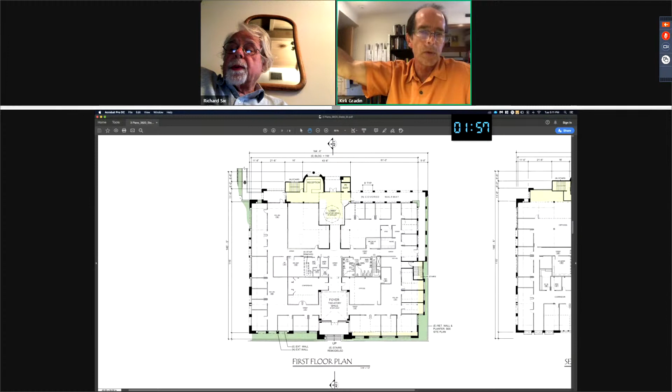Towards the back is where we're pushing out the most. We're 250 feet away from the street on that side, so we feel like we can do that without imposing on anyone. And we're also on the west side in relation to the pepper tree. We've pulled this - you'll see the 3rd story back away from that side as well.

So we're not imposing. The second floor plan, which is just to the right, shows where we're cutting out interior areas of the second floor in order to create light wells to provide natural light to the inside of the building. And the 3rd floor, which is just above that, shows how we're concentrating the third floor mass towards the back, which on the photo sim, on the next page, you'll see that from the State Street side, it nearly disappears because of the distance back.

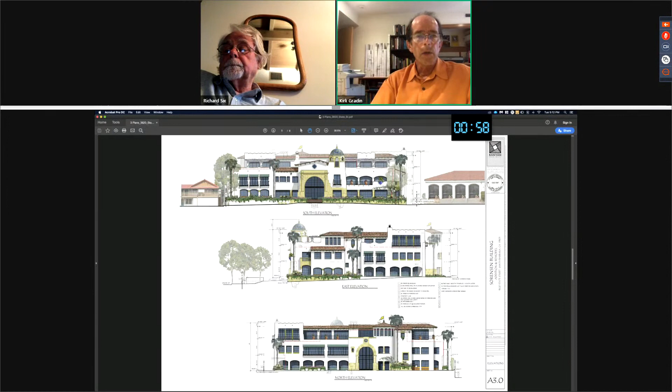So on the top elevation, the south elevation, which shows existing buildings on both sides as well, and has a dashed red line showing the outline of the existing building.

There's a large mechanical enclosure at this on the second floor roof, which you can see is just about 3 to 4 to 5 feet below where we're going to end up being sort of our average third floor roof height.

Parts of our third floor do come forward of that, but a significant majority of it is behind it. So from the State Street side, that third floor is going to be much recessed.

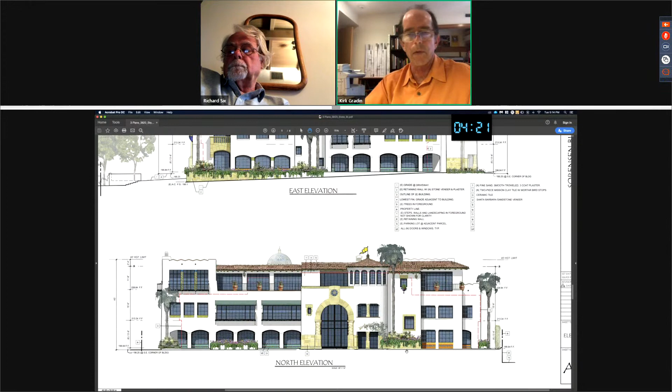We want to get some sort of sense that we're headed in the right direction here before we go too much further with the design work.

And Mr. Six, you're still muted.

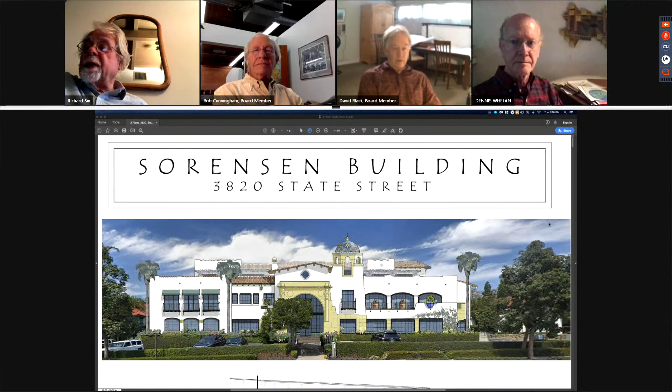So why don't we start with you, Bob. Mr. Cunningham. There he is, Leon. Yes, hi. Oh, okay, go ahead Leon. Leon's muted. All right, there we go. I don't have any questions at this point, there's a lot to consider here, and I think I'm not quite ready to make my questions. Okay, so we'll go to you, Bob, Mr. Cunningham. Okay, thank you.

Really just one question, Kirk. Did you consider for your parking lot over the parking basement, placing raised tree planters directly over columns that would support the roof? Yes, yes, and if we go to that site plan page I can show you where those are located. Which is, you need a page number, right? It's A1.1, sorry, there we are. So the site plan on the right, if we focus in towards where the parking attaches to the building.

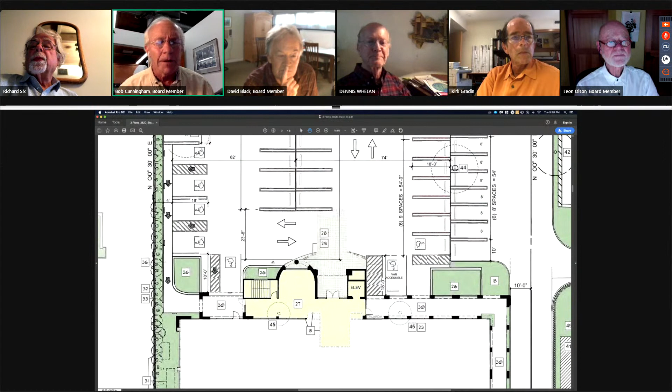I do, but you're not answering my question. You need shade on the parking lot, and adding those planters on the north side of the building does not provide that. My question was, can you locate columns in the basement supporting the roof and also supporting tree planters in the open area of the parking lot above?

It may be possible. I would have to consult with the engineer on that, and it would certainly add to the size of the parking garage, I would think. But to be honest with you, I don't know. I do know that in previous projects I've seen others propose, putting planting over submerged parking is problematic because of the additional weight and water.

But we can certainly look at it at a further stage. That's why I based my question on the addition of columns that would support the planters. I'm not convinced it cannot be done, but yes, please do explore that. And that's it for my questions.

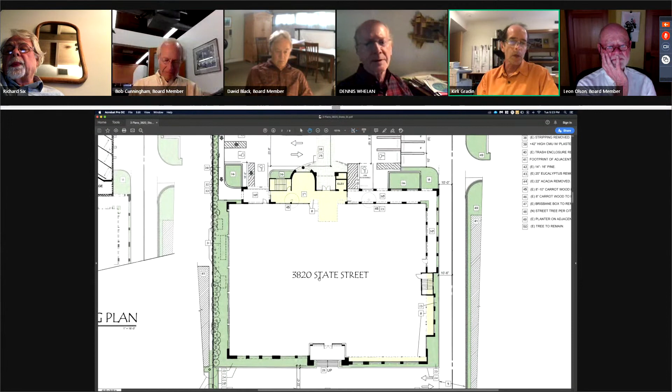Very good, thank you. And am I correct in deducing that the new parking structure allows for direct entry into the building and up to the third floor? Yes, if we go back to A1.1 again - on the left-hand side there, the lower level parking, the other side of the sheet. This shows the entry at the basement level.

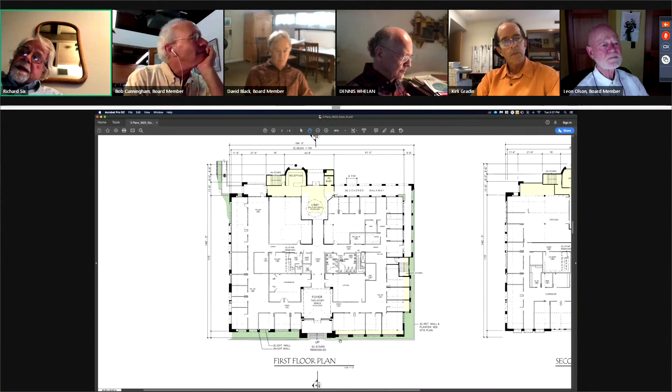So my other question - if we can go to the floor plans and zoom in on the left-hand ground floor plan. As I understand, this is a box, and I understand the red line and so forth. You are especially, well a little bit on the front side, but a lot on the east side, occupying what I would consider precious foreground planting with building and arcade and so forth. Is the reason for that just to get manipulations in the building form, or is there actually some functional need - I see some added square footage there. Is that an absolutely necessary program-driven increase in square footage along the east side?

Well, along the east side, obviously it affects the floors up above. So if you look at, and you don't have to move the drawing, it does affect both the floor plan and the massing at the second and third floor. And that particular corner at both floors, the northeast corner, is the most

precious part of the building in terms of views, sunlight, and northern exposure. There are a couple of outdoor areas there, a really prime spot on the site, so we were trying to take best advantage of that. In order to build out and increase square footage on that side at the upper floors, it also meant adding down at the first floor, but rather than turning it into square footage there, we made it an open arcade, a traditional feature.

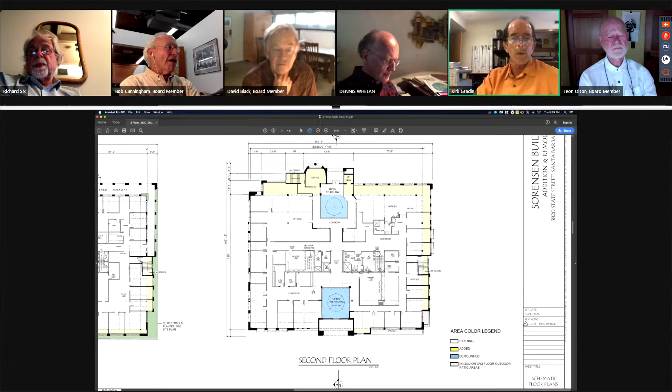Just one more addition: this northeast corner, we felt, because the property to the east is lower, dropping, that this corner of the building is the least impactful in relation to surrounding buildings. And because the bank building is also some distance away, besides being a key location in terms of desirable square footage at the second and third floors.

Shall we start with Mr. Cunningham on comments? Are you ready, Bob? I am, thank you. May we go to the elevations, please? Okay, good, thank you.

Kirk, I really appreciate your bringing Spanish Colonial to this part of State Street. I found the Mark and Grace Village to be kind of a poke in my eye. This is my neighborhood, and I had always hoped that additional architecture in this stretch of State Street would more emulate what Detlev Peikert did on the corner of Hope Avenue and State several years ago with his mixed-use building.

So I do appreciate this. However, I have to say that I agree with Steve House's comment. I think the building is too complex with the architectural elements and too grand. The very big arching entries, the stonework, and the towers are just a little over the top. I would appreciate it if you would stay on this theme but tone it down and simplify it.

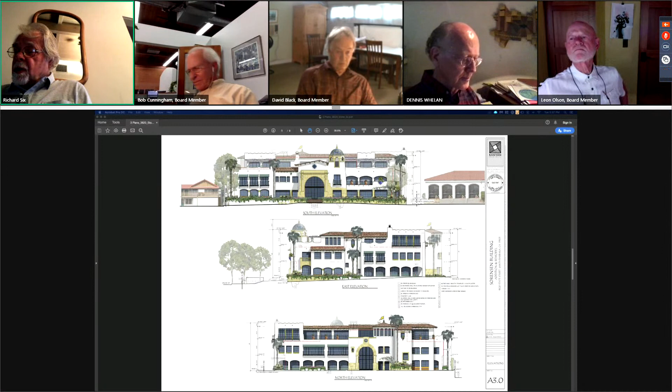So with that, Kirk, I think you can speak up here, but I think that it would behoove you to come back to us before going to Planning Commission. Would you agree with that?

Mr. Six, actually, this could not go to Planning Commission right now. It has not submitted for DART, and that was the first step. So it's here to kind of gauge what you guys think before it starts its DART process.

Does anybody have a motion to offer?

I'll take a stab at it. I would like to make a motion for indefinite continuance for the applicant to restudy the architecture. The board has no objection to a 3-story building. It's appropriate in this neighborhood, but the building forms need to be simplified and made less complex. I don't know how much more I need to say.

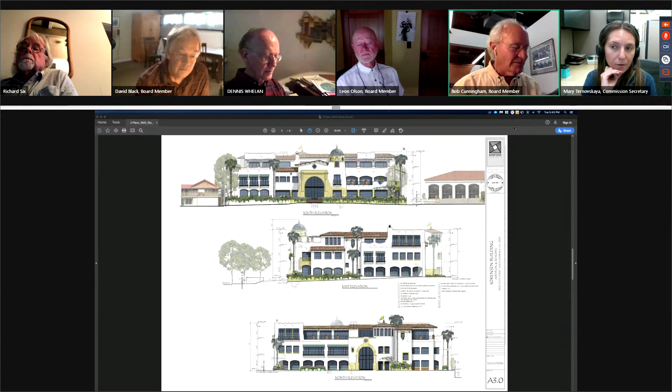So we have a motion on the floor. Shall we take roll call, please? Vice Chair Six, yes. Board Member Black, yes. Board Member Cunningham, yes. Board Member Olson, yes. And Board Member Whelan, yes. All right, the motion passes.